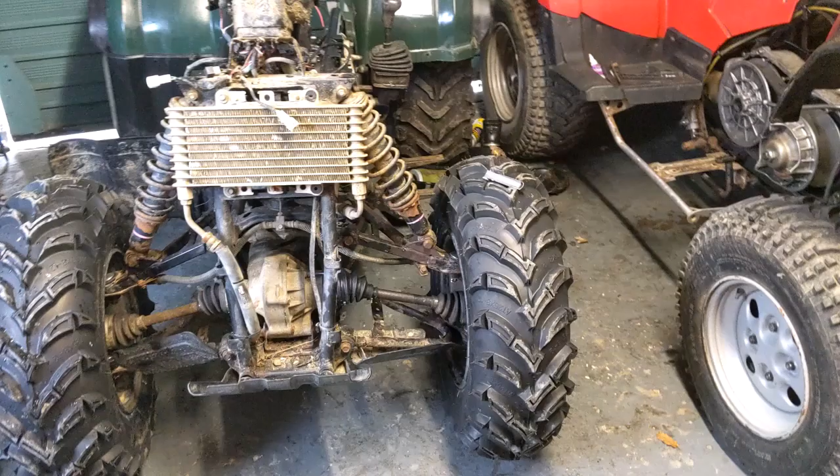But today is going to be on the Bruin, not the 700 diesel or the 550 XR. We haven't touched the Bruin for a little while now, to be honest. We did quite a lot of work on it, but then we got the 550, so we've been sort of fascinated by that. But if you watched previous videos, you'll know we've done a bit to it already.

We've got 4 new ball joints on it, on either side. There's a video on how to do them. And that's tightened the suspension up much more. None of the other bushings are bad, they're all good. We've got a new pair of brake calipers on with new pads. We've got a new CV boot on it.

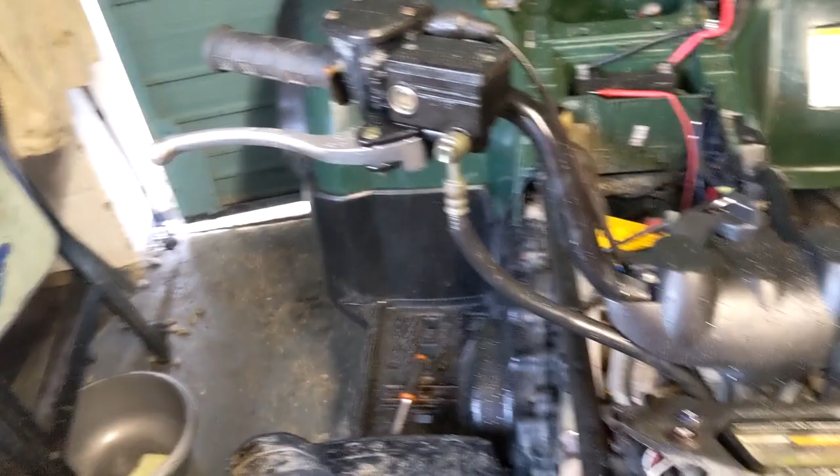We've got a new master cylinder on it, and we've obviously bled them brakes through, and we've got decent hydraulic pressure. We might need to bleed them just a little bit more, but obviously we haven't ridden it yet, so I don't know if we're going to need to or not. We've got new, nice, chunky, aggressive tyres on it. On the front, the backs were fine.

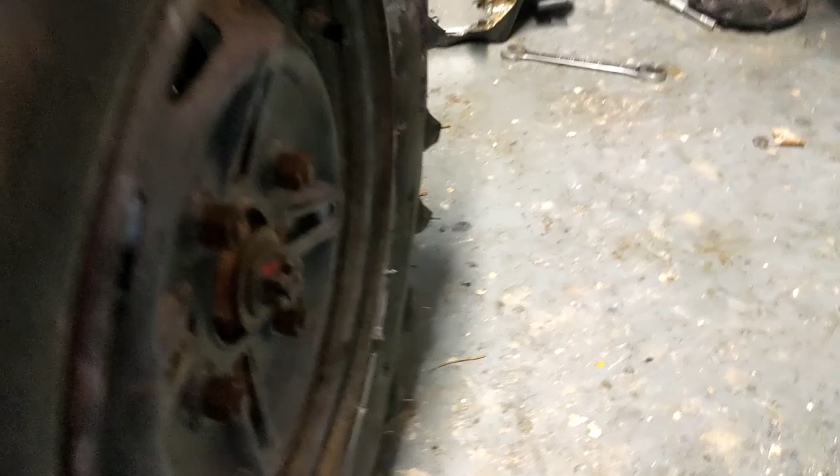If you want to know, these are actually made by a company called Protector. As you can see there, they're Chinese-made tyres, but they are reasonable. They're quite good quality. They get you through most stuff, and they're not the cheapest, so they are decent tyres.

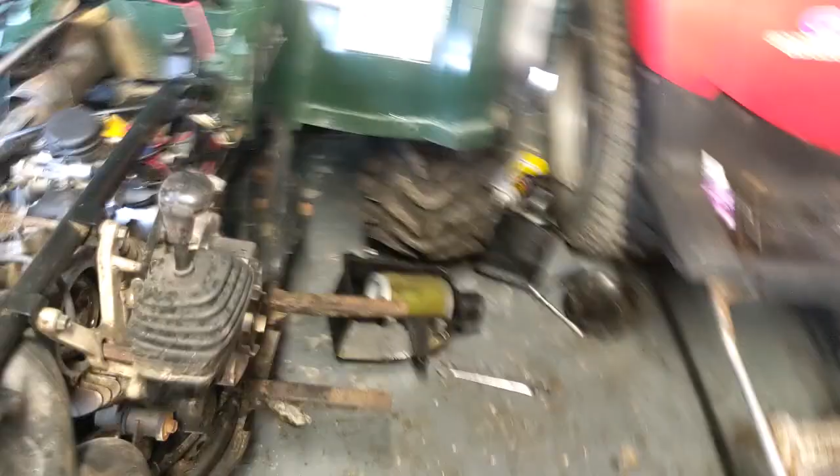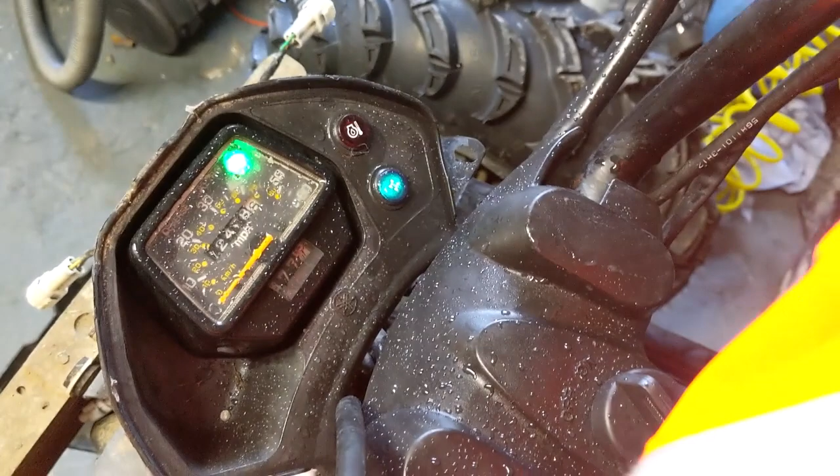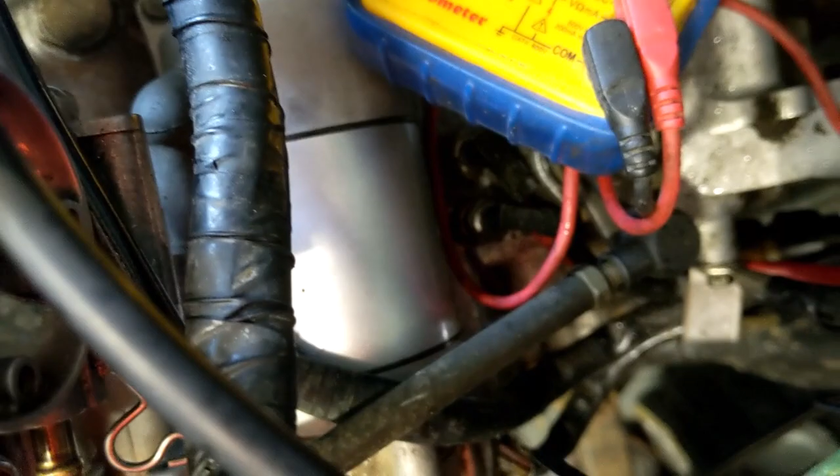We've got a new ignition key on there, as you can see. All lights up as it should now. 2 keys with it. If you watched the original video, you'd have seen this 4x4 light wasn't illuminating. But as you can see now it is, and it switches off with 2-wheel drive and comes back on with 4-wheel drive. We've also replaced the solenoid on it, which we robbed for a different bike, and we've also got a new starter motor on it, and a new battery, of course.

Again, if you watch the original video, this came to me with carburetor problems, or supposed carburetor problems. So we put a new aftermarket carb on, which is supposed to be a decent quality one, and we tried to start it up, and it did run. But it will only run past half throttle, and it just dies after a couple of minutes, and it's incredibly difficult to get it to actually start. It takes a lot of cranking.

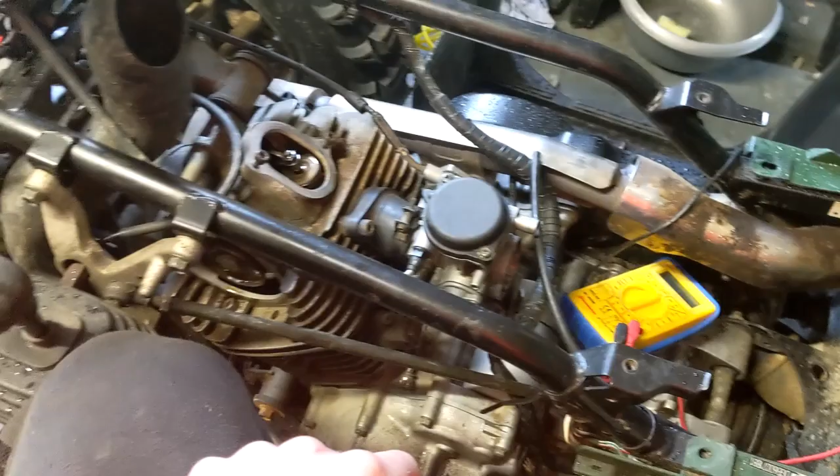We've got decent spark on it, and we put the original carb back on, and it's doing the exact same thing. And sometimes, depending on the condition, it seems quite random. It just won't run at all. You'll spray easy start directly into the carb, and it'll just do absolutely nothing. So I'm pretty sure that the issue we're having isn't a carburetor issue, and I'm pretty sure it's not a mechanical issue. We've got plenty of compression turning it over, all seems well.

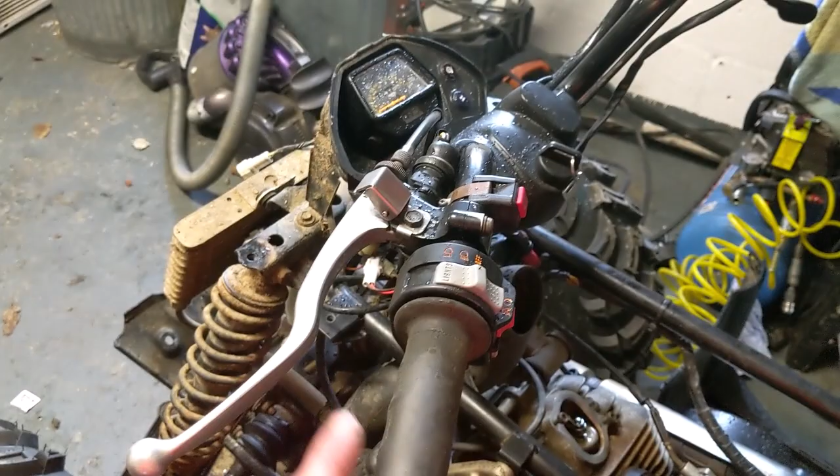So I'm going to do a few things today to try and diagnose exactly what is going on with it. We've taken the front plastics off to make things easier, and we've also sent the racks off to the powder coaters, because these racks on these bikes have a horrible sort of textured finish from factory, and it's almost impossible to get down smooth with sandpaper. So we've sent it off to the powder coaters to be done nicely.

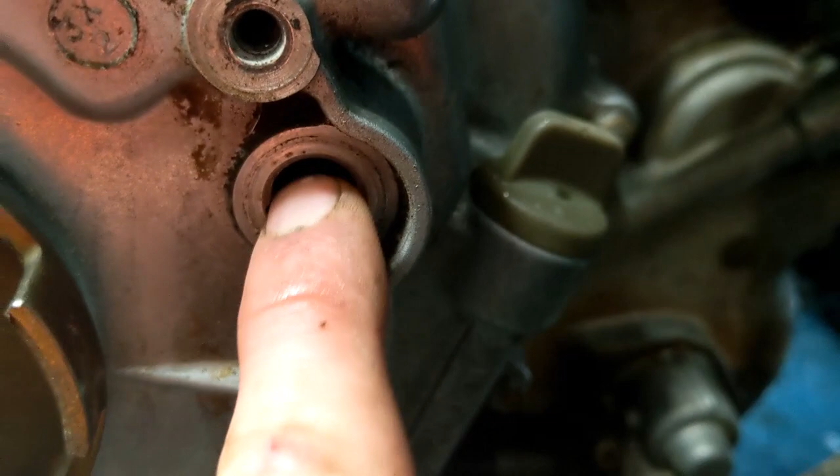So I'm just going to check the valve clearances. To do that, you want to put it on the compression stroke at top dead centre. So you want this mark here. Can you see that? Yeah, that mark there, you want to be aligned with this notch here. And you probably won't see in there, but there's a little line on the crank you want to align with this slot here. Obviously need to take this cover off, take that little nut off, and take the plate off that covers that. But look how clean this engine is.

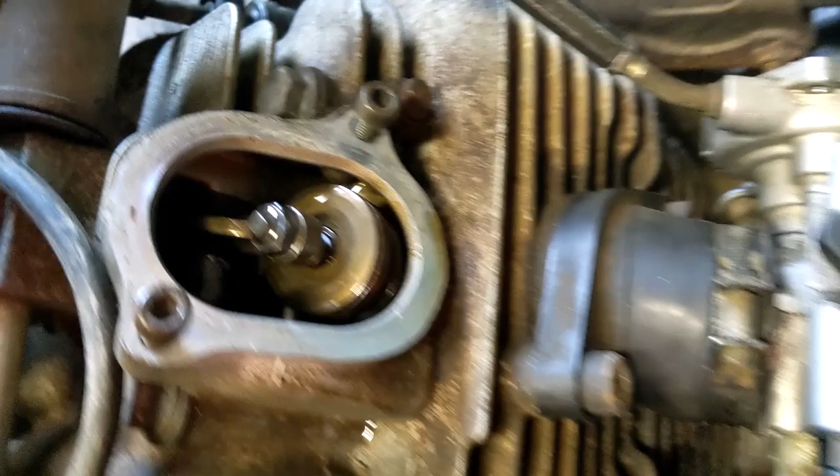I don't see many in this clean condition, especially not 10 plus years old. There's barely a bit of tar or muck or anything in there. That's very nice indeed. Same down the chain, look, there's no tar or sludge or anything. Extremely clean engine.

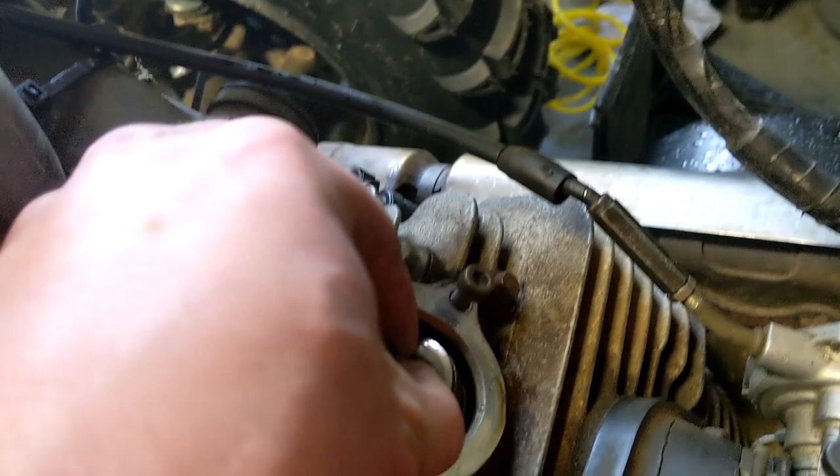So, just looking at it now, it's cold. Just feeling that, I know there's not a lot of play in it, but they may be too tight, potentially. So I know the intake is supposed to be 0.06 of a mil, so I'm going to get my feeler gauges, which I've got here, and have a little look. So I'll just find the 0.06 and be back.

Okay, so that's a 0.063 on the feeler gauge, so about as tight as it should be, and it's nice resistant in there, look. So that's spot on. You don't want them loose. You want them to be as tight as they can be. And when it was running, when we did get it to run, I could hear hardly any tapping. It was sounding very smooth indeed.

So I'm not even going to bother checking the exhaust. I'm certain that these are correct. That's right within tolerance, and the exhaust is a bit more of a pain to get to. So I'd say I'm not even going to bother checking. So I'll stick that cover back on, and then I think we've got to try and have a look at electrical issues.

I have known a bike before have the trigger coil go inside this case, which caused erratic spark timing. It would spark, and it would spark strongly, but you never really knew when it was sparking. It would backfire through the carb and do all sorts of strange things. I think personally we might have a spark issue. I don't know exactly what. Obviously there's a few components to this system.

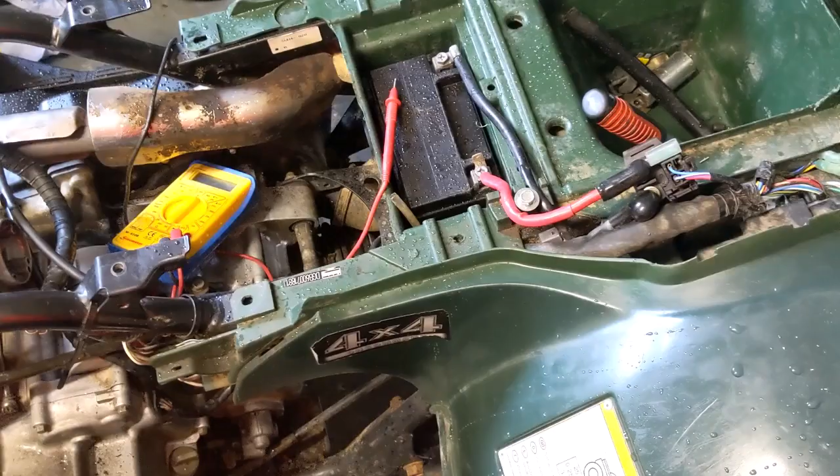You've got the stator itself, which charges the battery, but I know that's operating because when I had it running I checked it with a voltmeter and it's running at about 13.9 volts, which is correct. You've got a voltage regulator, but if that wasn't working I wouldn't expect the battery to be charging, so I'm not too worried about that. You've got your CDI, which is basically the computer for the whole bike. You've got your coil, and as I say, you've got the trigger coil in there, which does your spark timing.

Now, I personally think it might be the trigger coil that's gone, not allowing it to start properly, but I'm going to test the coil, and then I'm going to test the resistance on that. So I've got to look up how to do that, and I'll be back.

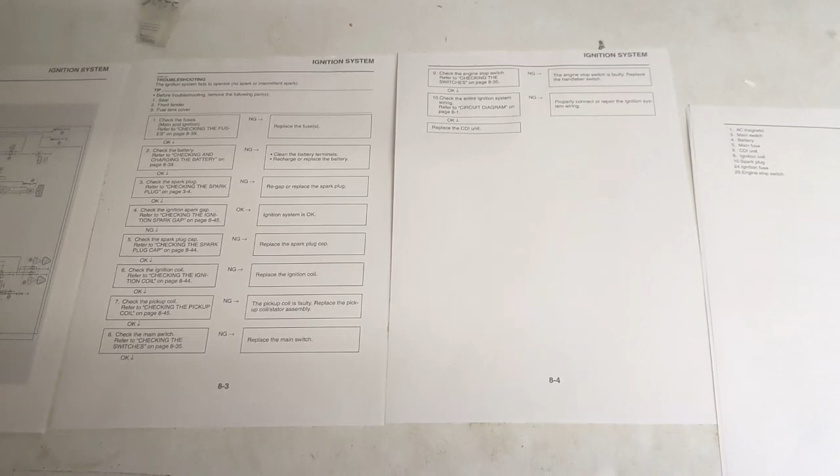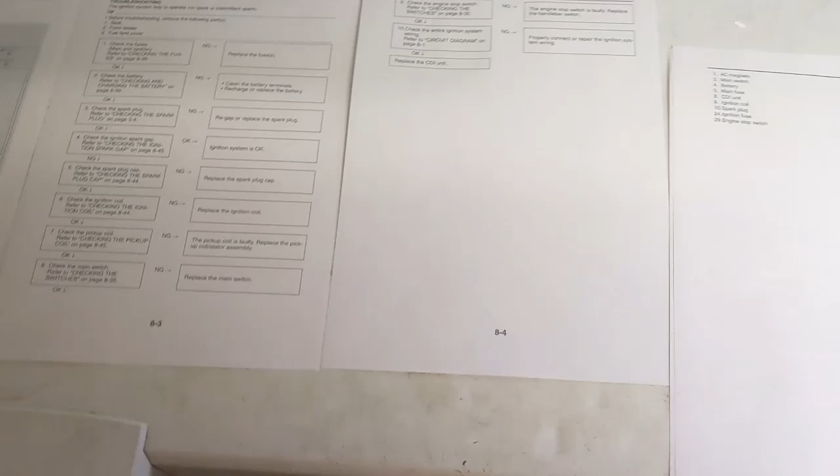Right, so I've been into the service manual now, and I've printed off the relevant pages. So we've got a full ignition circuit diagram here. And we've also got these ignition circuit troubleshooting pages. Now, I don't care how good of a mechanic you are, these are the most handy tool you can have, because obviously these people made the machine, so they know exactly what's going on with it. I'm not a qualified mechanic, to be honest, and electrical isn't my best thing, so I find these extremely handy. Unless you really know what you're doing, these are such a good investment.

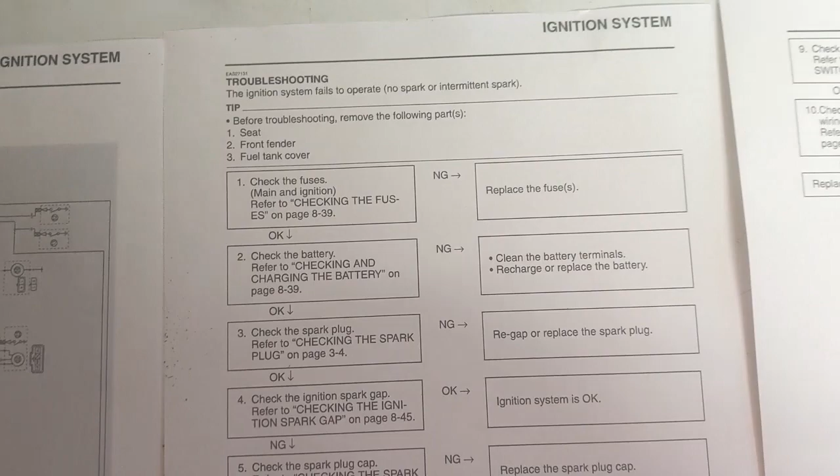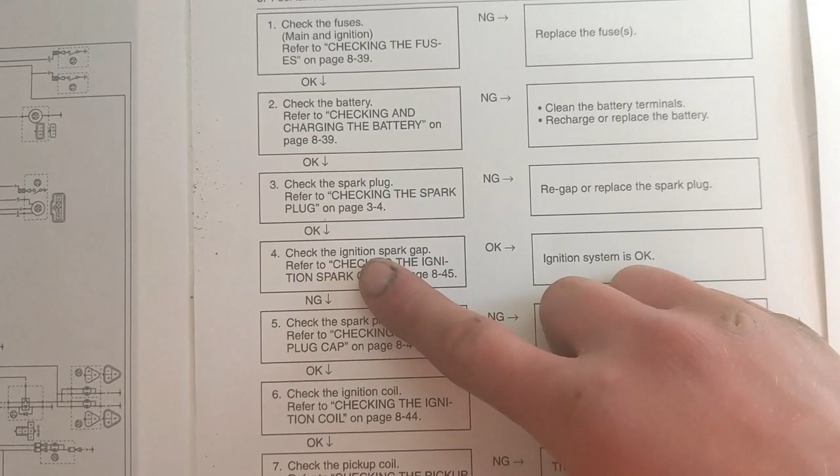So certain things we can check off straight away. So check the fuses, and we can check them off because we know we've got a spark. We just think it's either a weak spark or an incorrectly timed spark. So I've checked the fuses as a matter of course, but obviously they're all okay. Check the battery, it's brand new. Check the spark plug, I put a new plug in it, so that's fine. Check the gap, well they come pre-gapped, so it's absolutely fine.

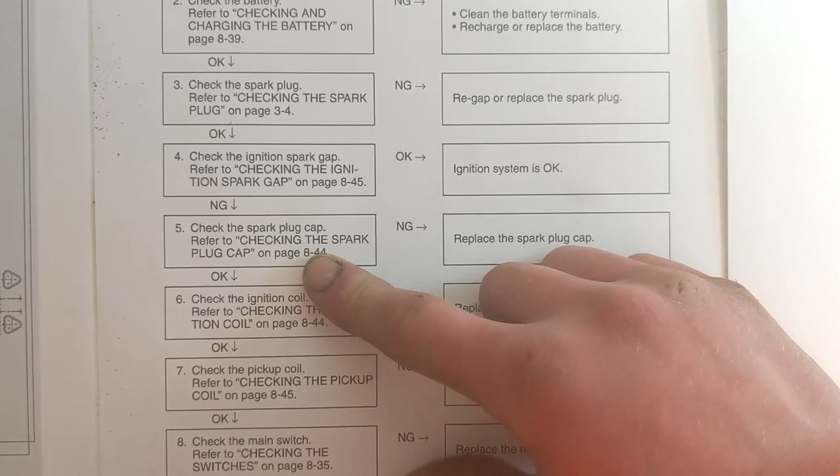Check the cap, we know that's correct, because I've tried a separate plug in it on the block just as a manual sort of spark check, so that's okay. Now check the ignition coil, we need to do that, and so that's refer to page 8-44. I've got that printout here, so I'll check the ignition coil.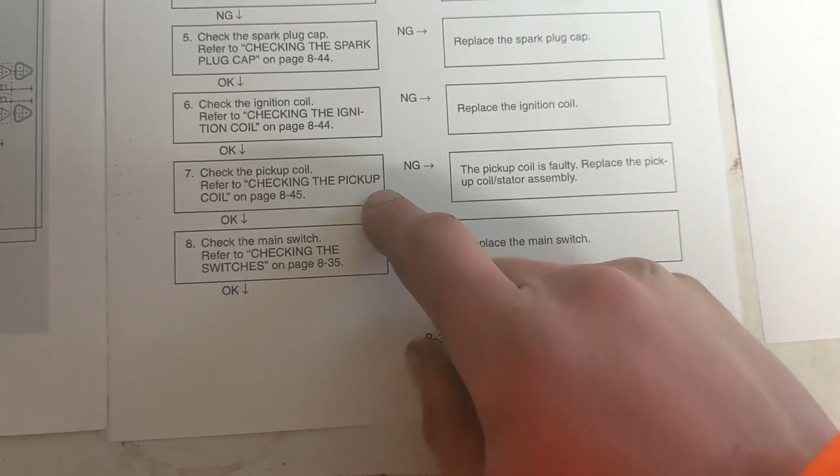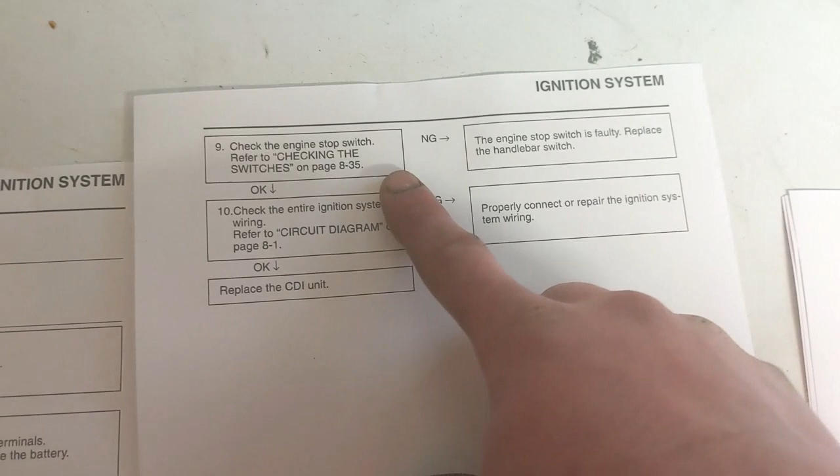Then we've got to check the pickup coil, which is what I was just talking about, that does your spark timing, and again 8-45, which I've got printed off here. And then check the main switch. Well, again, the main switch is brand new, so that's not going to be our issue. Check engine stop switch. Well, if that was faulty, then we wouldn't have any spark at all, so we can pretty much rule that out.

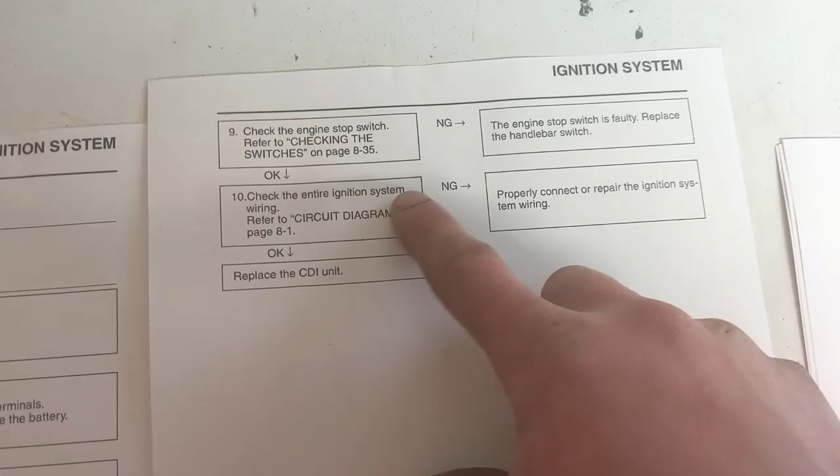Check ignition system wiring. Don't want to do that because that involves uncoiling everything, but to be honest, I highly doubt it's that. And if none of those things check out, replace the CDI unit. So to start with, we're going to check the ignition coil. As I say, we've got all this information printed off here. That's the corresponding sheet for the diagram telling you what's what.

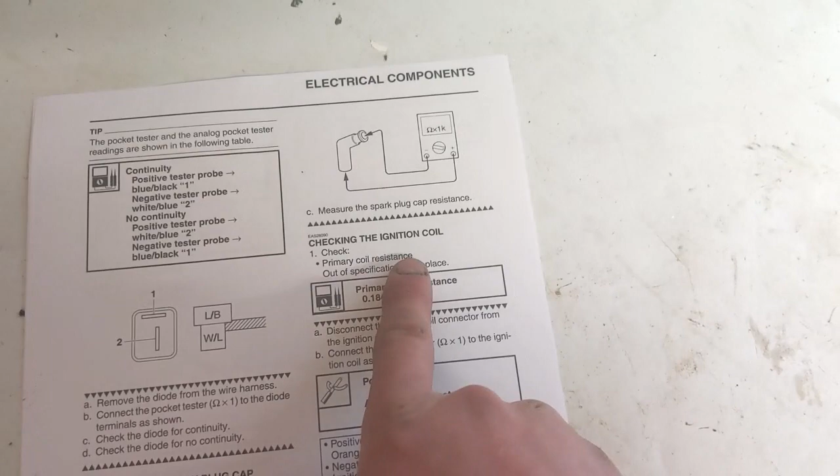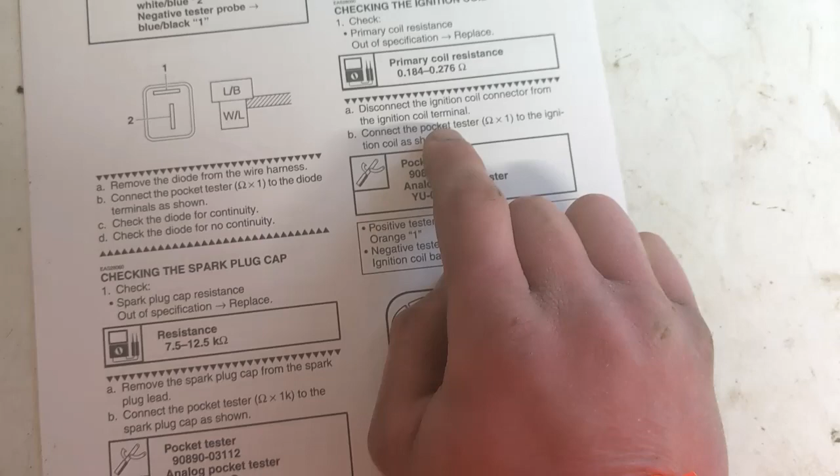So checking the ignition coil, we need to check the primary coil resistance, and if it's out of specification, replace it. So we've got the resistance there. So disconnect the ignition coil connector from the coil terminal, obviously. Connect the multimeter on the ohm setting to the ignition coil as shown. Okay. So positive tester on probe 1, negative tester on ignition base 2. Okay, so I'll get to the ignition coil now. I might not need to take it off, but I'll have a look and I'll come back to you once I've got a reading.

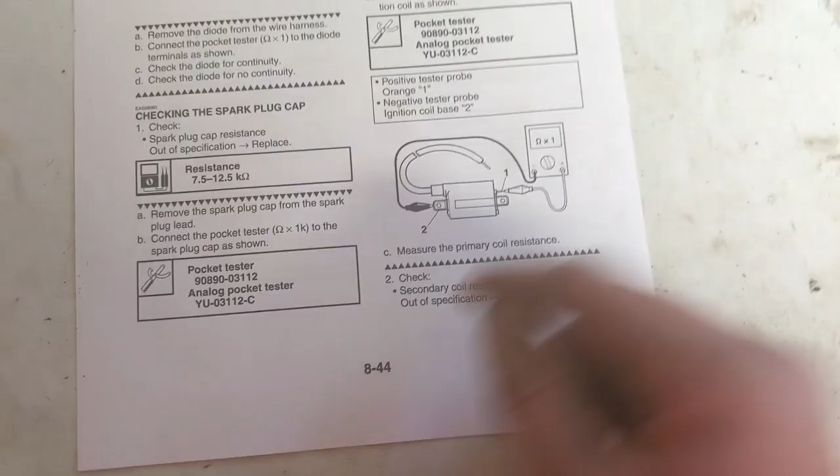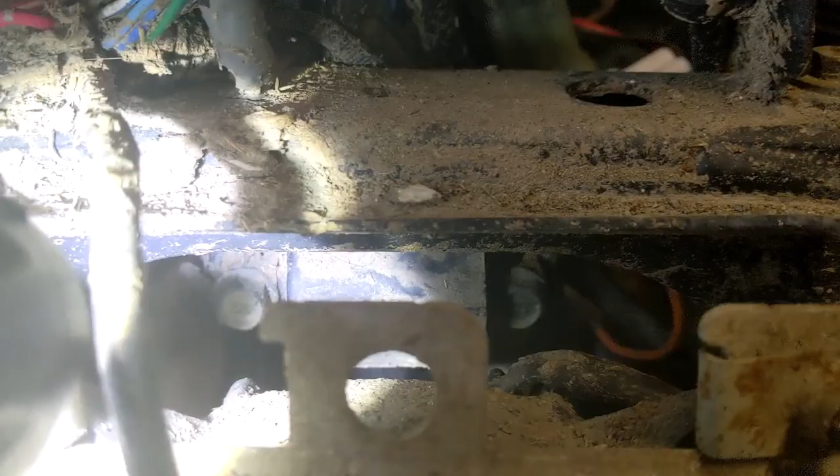Okay, so here's our ignition coil. You can see the orange probe there. So we'll have to get the tester onto that, and then the other one we need to put on the base of the actual coil, so I'll just do that now quickly because I don't think I can film it.

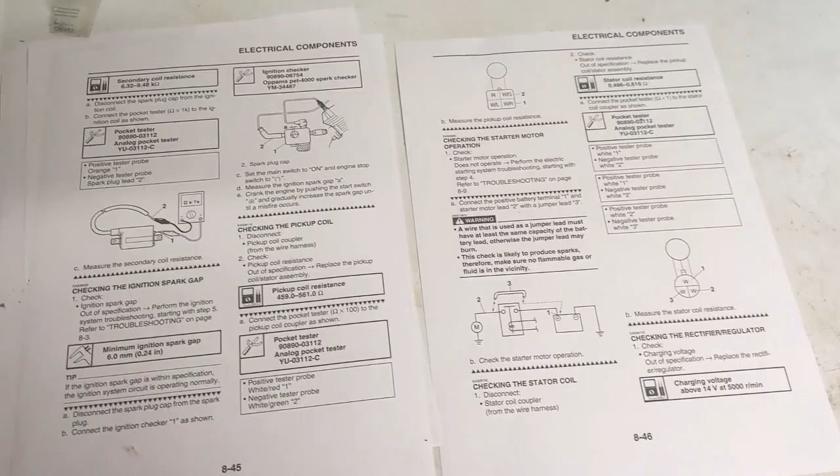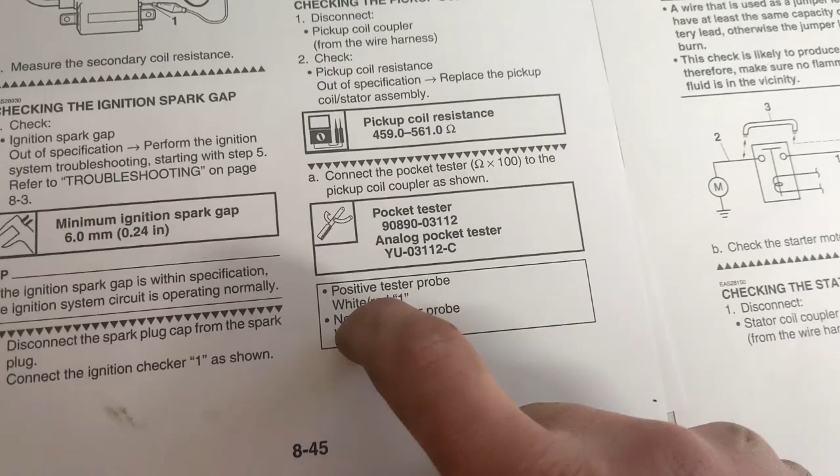Okay, so we should be a bit more capable of checking the trigger coil. As you can see in the manual here, checking the pickup coil. Pickup coil resistance should be 459 to 561 ohms, which is more like the meter can do. As you can see here, you've got a 2000 ohm setting and a 200 ohm setting, so it should be able to do that. And we've got the red and white wire is positive tester probe, and the negative is the white and green. So I've already disconnected it over here, and I've already tested, and we're getting 510 ohms.

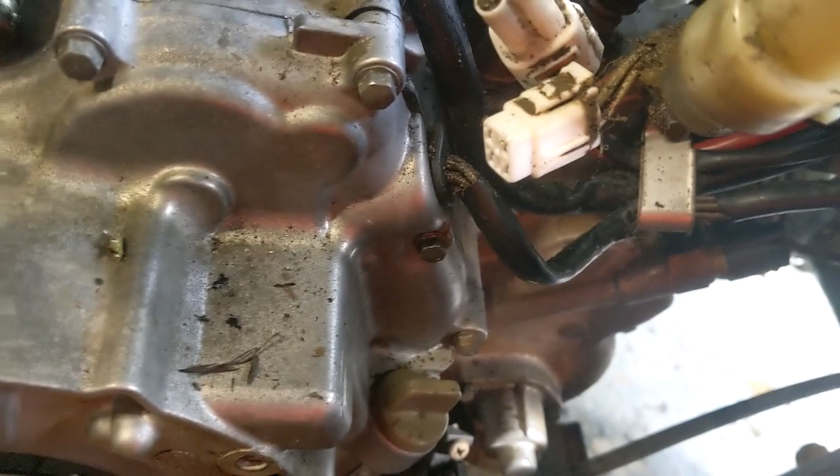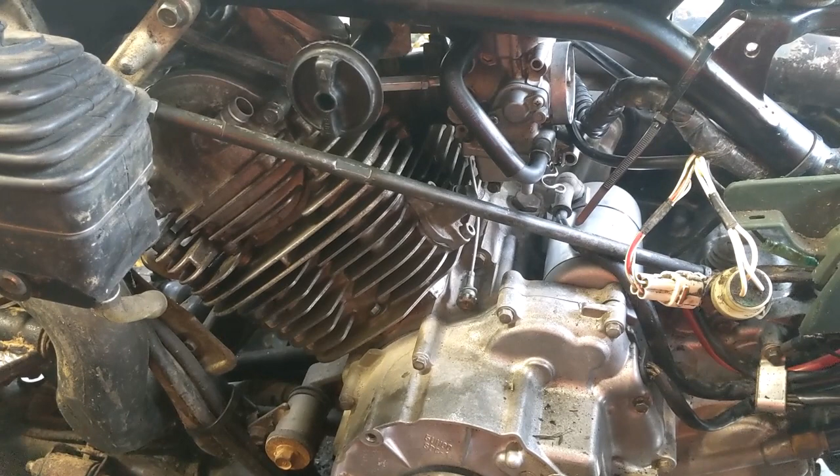I'll see if I can get it on camera to show you. Okay, so as you can see there, we've got 510 ohms coming from the pickup coil. So in theory that's good, which is good because we don't have to replace the pickup coil, but it's bad because we still don't know what the hell is wrong with it. The only other thing it could possibly be is the CDI box, but they ain't cheap, so I don't really want to replace that willy-nilly. And there's no test procedure you can do on the CDI box.

So I'm wondering if the next thing we have to do will have to be a compression test. Now there is one other thing that could cause the spark timing to go out, and that is if the flywheel key is partially sheared and the flywheel has moved out of position somewhat. But that involves removing this casting as if you were going to replace the trigger coil assembly. So you've got to drain the oil, and obviously you've got to put a new gasket on. So that's a little bit of a job to do if it's not the problem.

So I'm going to have a little think, really. We know it runs, so we know it can't be anything too major. But it really is just a bit of a guess at this point. We've checked the fuses, we've checked the ignition coil, we think that's fine. We've checked the pickup coil, that appears to be fine. We checked the valve adjustments, they appear to be fine. And compression appears to be fine. So I'm going to have a little bit of a think, and I'll have to come back later on today, or it may be later.

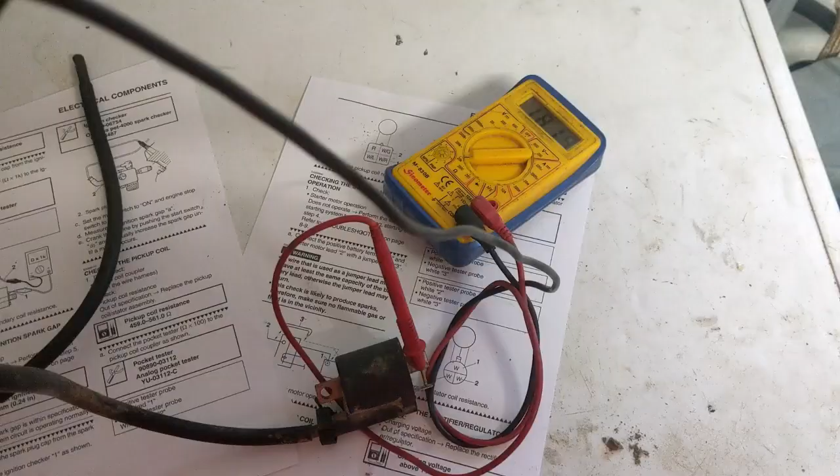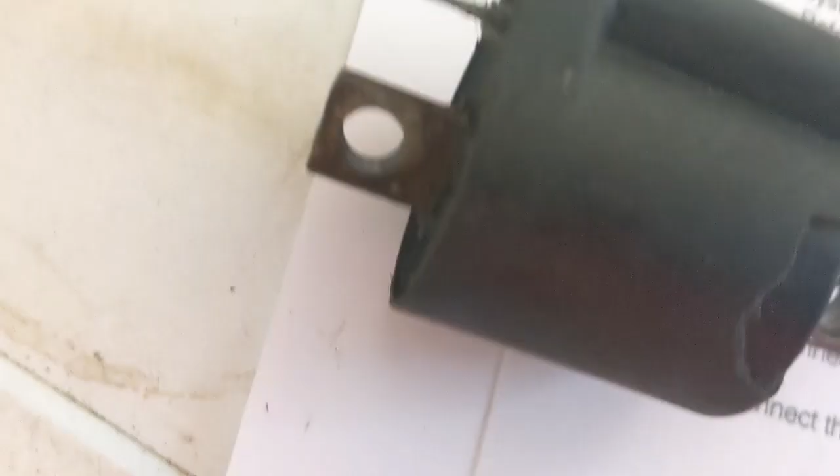It'll still be in this video, but I'm going to have a think. Right, so I think I'm able to show you something. I wasn't aware, or I didn't notice in the manual, there's actually two coil checks you can do. The first one is as we did from the orange terminal to the block, but you can also do from the orange terminal to the actual HT lead.

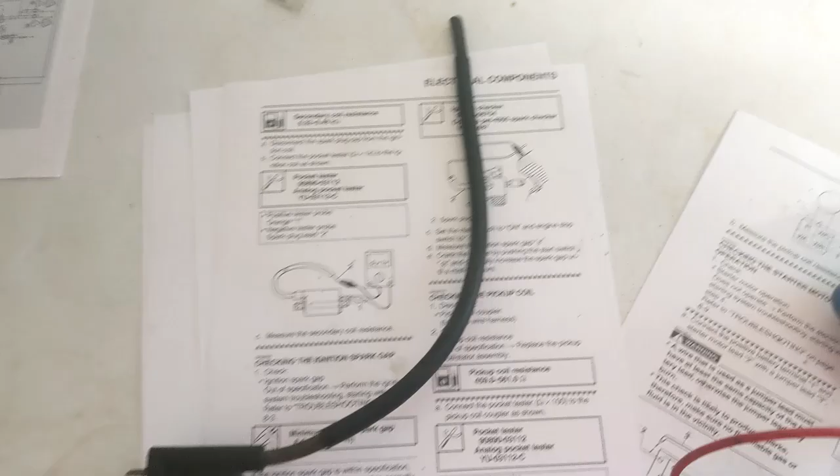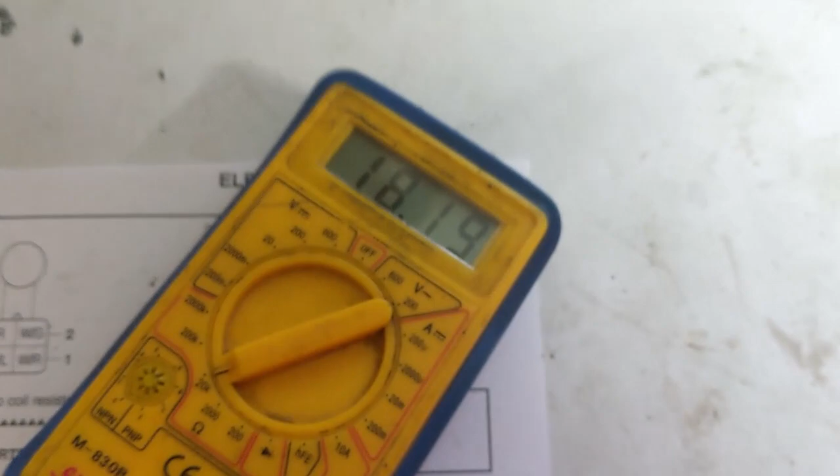And that is more capable of measuring with this meter, because it's got a 20,000 ohm setting. And if we look in the manual, the specified range for this test is 6.32 thousand ohms to 9.48 thousand ohms. And what are we getting with the original coil? Well, we're getting 18.19 thousand ohms. So that is massively too resistant, which would lead to a weak spark.

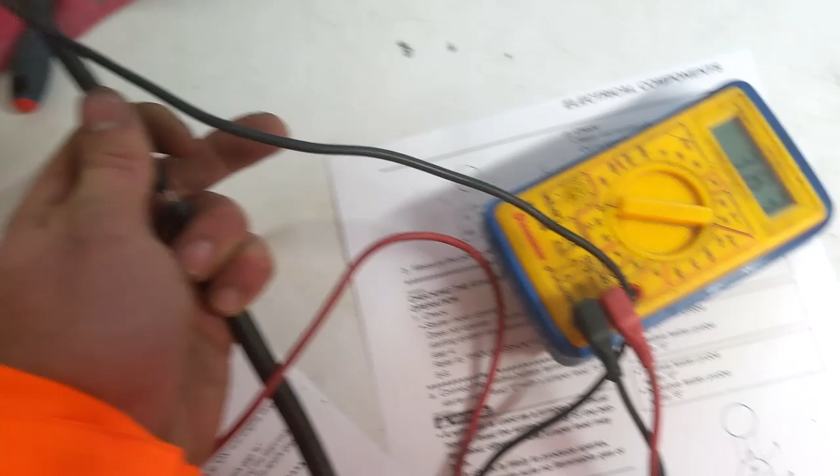So if we test this coil that I've had lying around for some time, let's see what this one says. It's going to be a bit of a pain to get it in the end. So that's measuring as it should, 7.77 thousand ohms. So that's within 6.32 to 9.48 thousand.

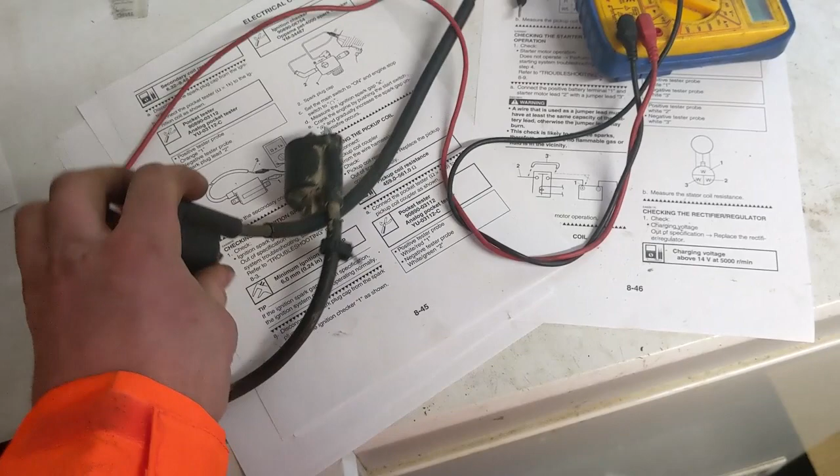So now, I believe the fitting for the spark plug is just a screw-in to the cable type fitting. So hopefully I'm going to be able to liberate it from this dead coil and put it onto the good coil. If I cannot, then I'll have to order one and give it a test. I have looked at these and the part numbers are actually identical. They're exactly the same coil on the 350 and the 400. So yeah, I'll try and do that and then I'll be back.

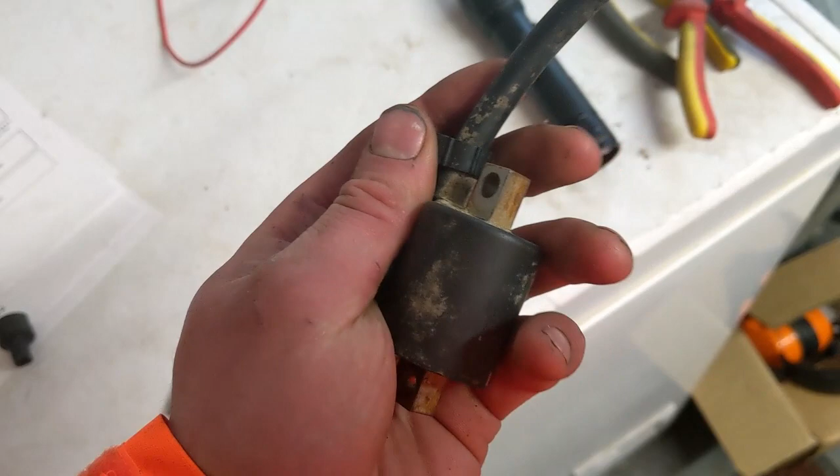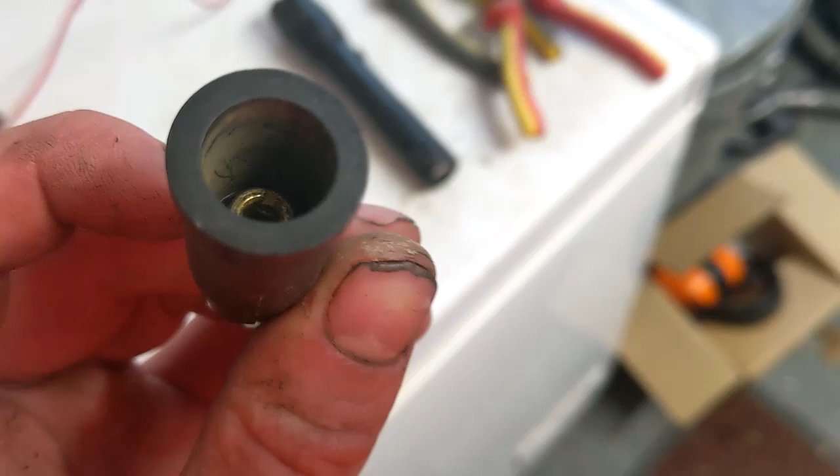Right, so this is going to be the final update for this video. I must admit, I do hate problems like this. They're properly annoying, having to test bits and pieces, but I'm not sure on the coil problem after all, because now I've taken this off, this coil does read the same as the other one, 7.7 some odd, but the actual boot itself says no continuity the right way through it, so there must be a break in there, you would imagine. Which I thought would work, because the spark would be struggling to jump through, and it would only be running at high RPM. So the spark would be travelling through at high RPM and jumping over the gap, if you like.

So that was my theory, but I've tried the coil just wrapped around the plug in a very ghetto way. I mean, it might not run like that. That might still be the problem, but I would think it would try. But I'm getting no running at all still. So I'm going to have to order a new coil.

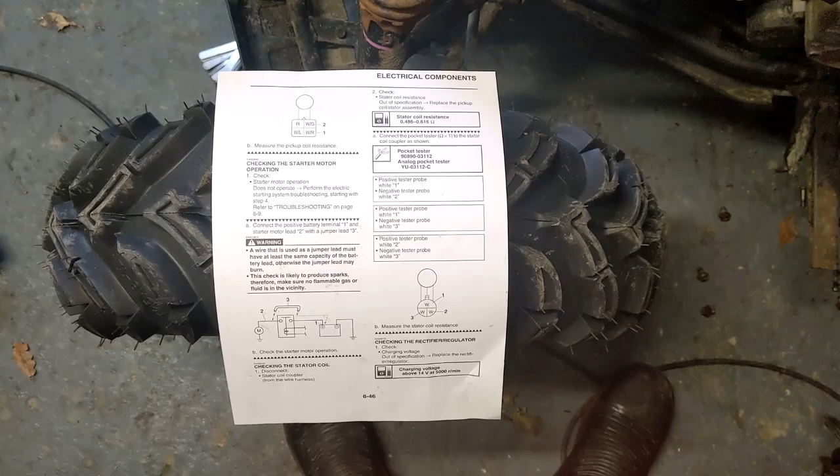I have also tried testing the stator. As you can see, there's 3 different combinations you need to try on this plug here. The range is 0.486 to 0.616 ohms. And I'm getting 0.9 out of every single one. So that could be a problem, but I just don't know, because as I say, the multimeter doesn't seem to work very well on very low ohm readings.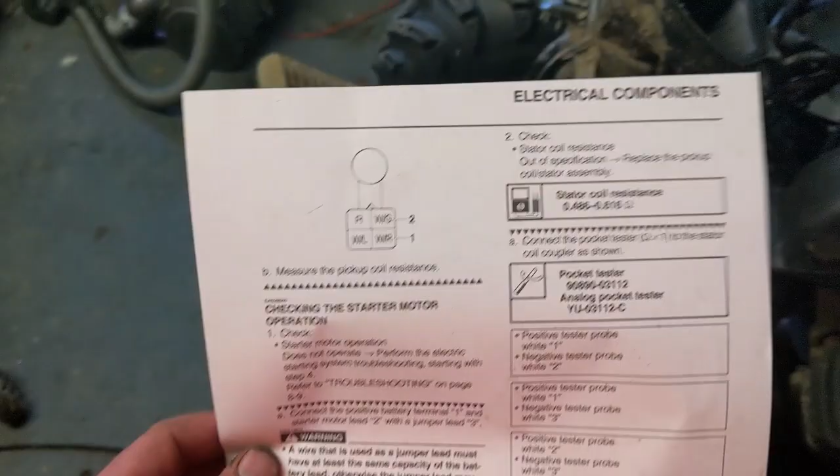So I think I'm going to end this video here, because there's not a lot more I can do today. I'm going to purchase a new coil, because they're hardly anything, they're like 15 quid. So we'll stick a new coil on just in case. And I'll also purchase 2 diagnostic tools. One is a good multimeter that I can test the stator properly with.

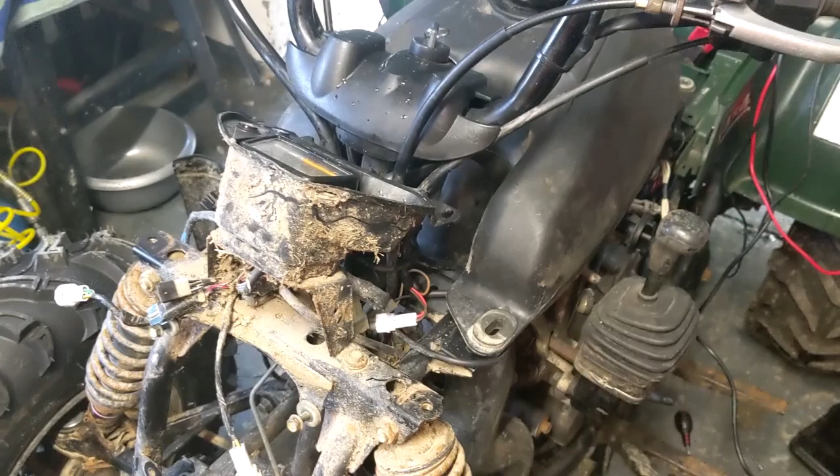And I'll also purchase a compression tester, because although it feels like very good compression, there's a chance that it might be low. That would cause these symptoms, but I really don't think so, looking inside the engine and feeling with my spanner on it. But it's worth a try, and I could do with one anyway. So I'll order a few bits, and then there'll be a second part to this video which will aim to actually get it running.